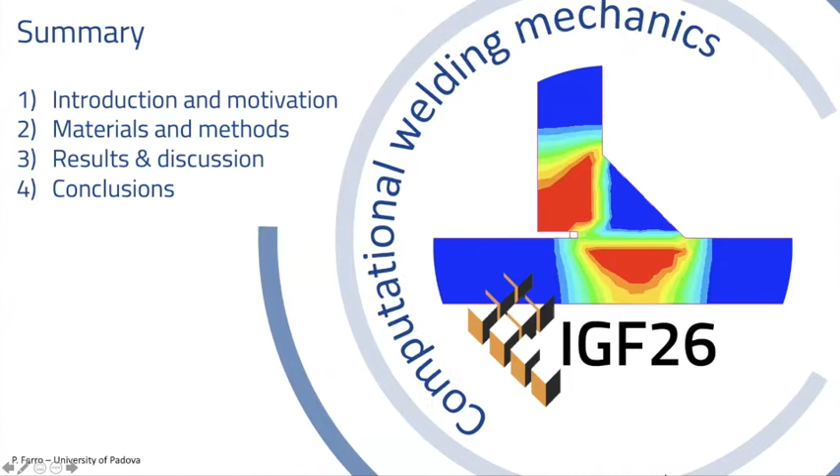This is the summary of the work. Number 1, introduction and motivation. Number 2, materials and methods. Number 3, results and discussion. And finally, as always, the conclusions.

Low-carbon structural steels, such as the S355, are characterized by good weldability and find application in production of steel bridges, structures, ships, and so on. However, it is unfortunate that welding operations induce high residual stresses that reduce the fatigue life of those components in the high cycle regime. Different strategies were developed to face this issue, and when possible, post-welding heat treatment aimed at reducing the residual stress intensity could be a solution.

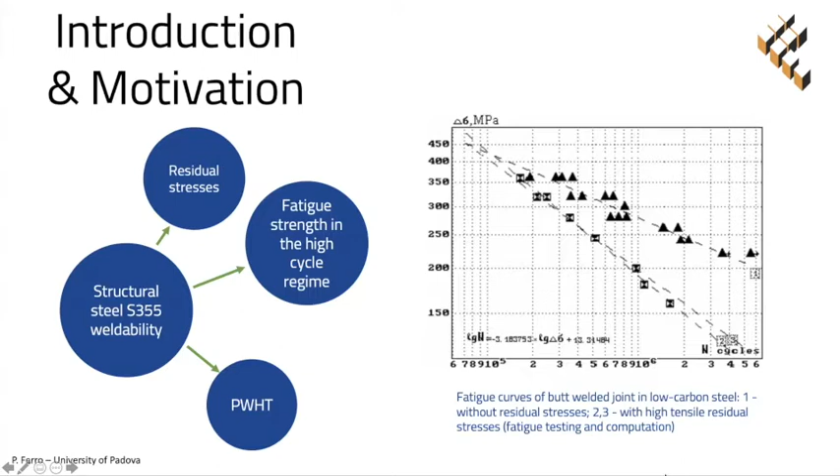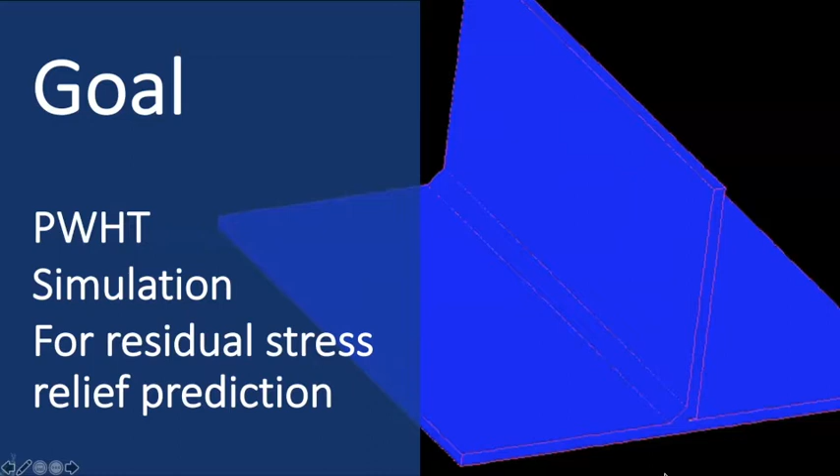In this scenario, prediction using numerical simulation of stress relief and deformation after post-welding heat treatment could be of great interest. But despite the great interest in models related to post-welding heat treatment simulation, in view of the prediction of a fatigue strength improvement coming from stress relief, not sufficient literature was found on this topic, and in particular when the common structural steel S355 is considered. Therefore, this work is aimed at filling this gap.

Square groove T-joints were obtained by arc welding a 5 mm thick web on a 5 mm thick flange made out of S355 steel using a single pass on only one side, as shown in the figure on the left side. Before welding, the flange and the web were tack welded and perfectly positioned perpendicularly to each other using a square. See the figure on the right side.

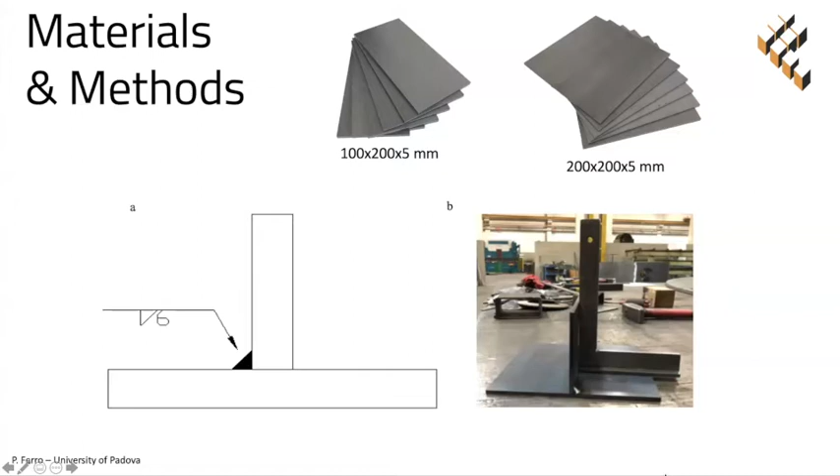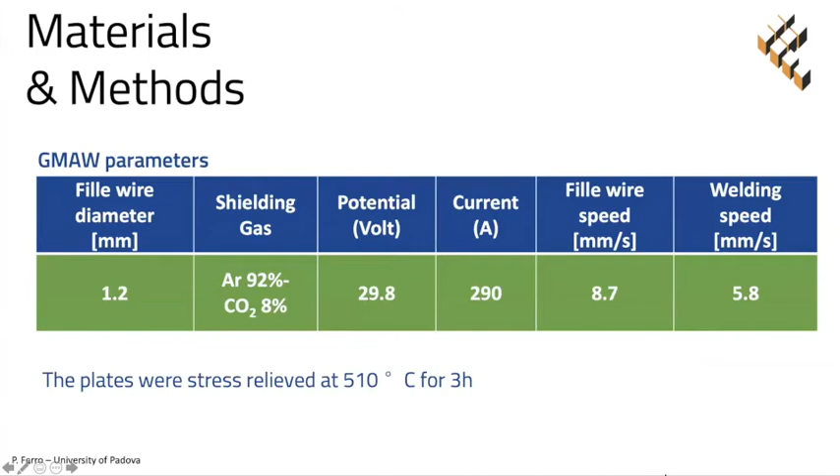More in detail, manual gas metal arc welding was used to produce the samples, and parameters are summarized in this table. After welding, the joints were heat treated at 510 Celsius degrees for 3 hours. The measurement of the joints' distortions before and after the stress relief heat treatment was performed using an absolute arm and a support to keep the sample in position during the measurements. The obtained point cloud was then elaborated via software to obtain the angle between the web and the flange.

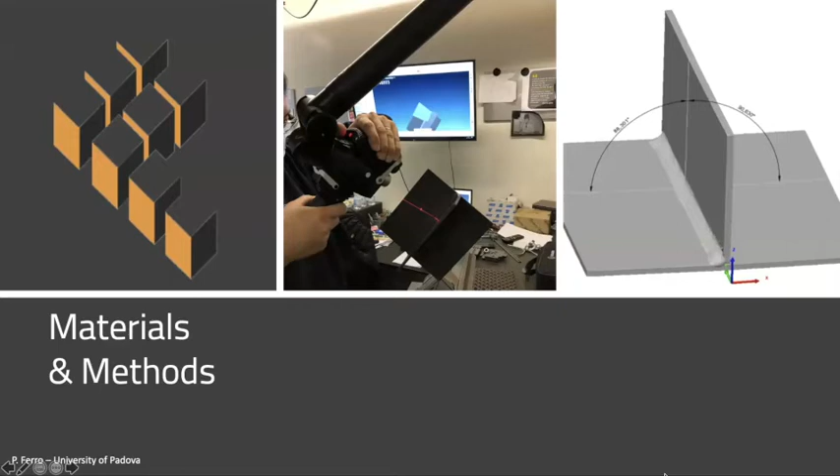The heat source was modeled using a double ellipsoid power density distribution function proposed by Goldak, where its parameters are calibrated by using experiments. Radiative heat loss using the Stefan Boltzmann law and convective heat loss were applied at the boundary of the plates to be joined. In the mechanical computation, the weldment was considered isostatically clamped.

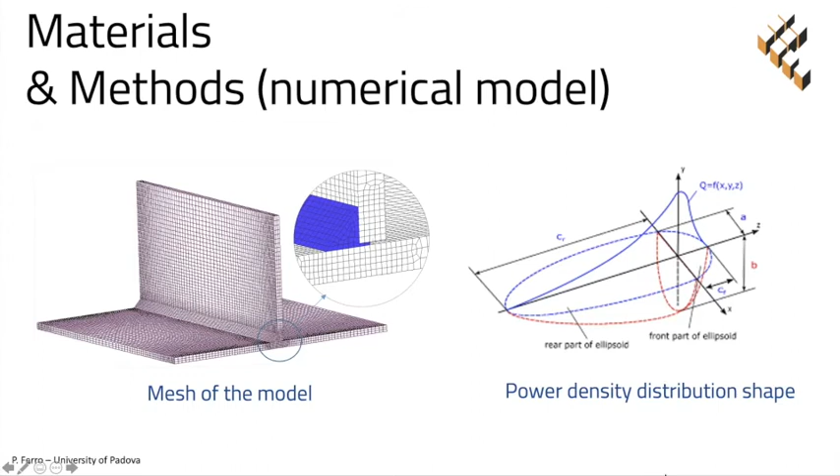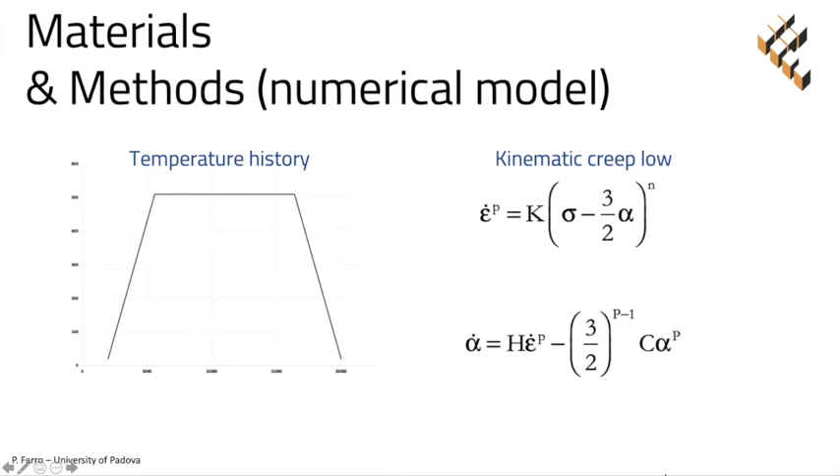After welding simulation, the joint underwent the furnace thermal history used to carry out the experimental stress relief heat treatment, as you can see in the figure on the left. In the mechanical computation, the viscoplastic deformation of the alloy was modeled by using the creep law written on the right side of this slide, where alpha is the kinematic strain hardening variable and H, K, C, P and N are temperature dependent parameters.

The fusion zone microstructure consists of acicular and Widmanstatten ferrite with islands of allotriomorphic ferrite, in agreement with the microstructure observed in low-carbon steel welded joints. The heat-affected zone, on the other hand, was mainly composed of bainite as predicted by the model.

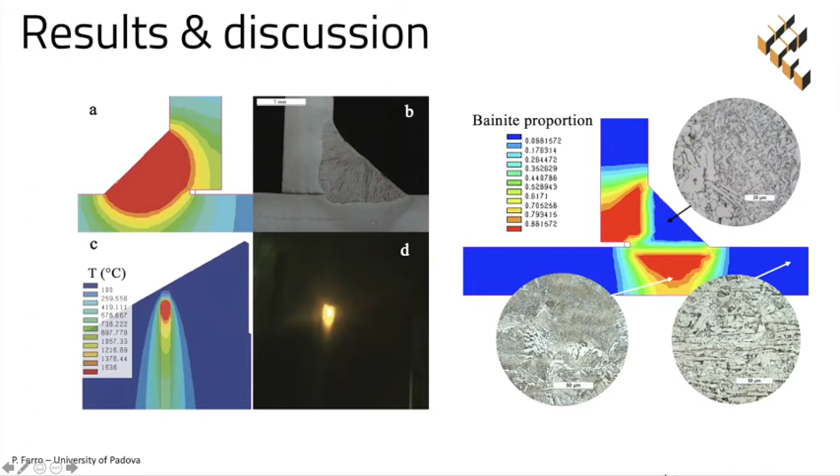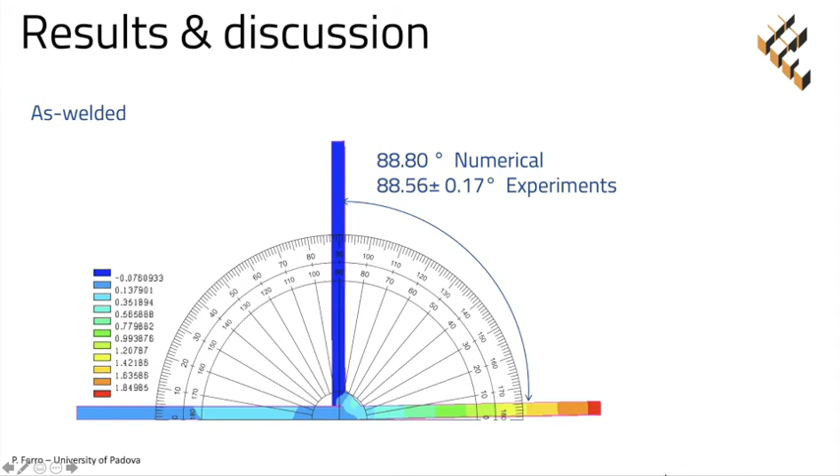After welding, the angle between the flange and the web obtained by the numerical model was 88.8 against an experimental value of 88.56, which is considered a reasonably good result. After stress relief heat treatment, the distortion angle didn't show any variation, and the numerical results confirmed that experimental evidence. However, residual stress reduced significantly as shown in this figure.

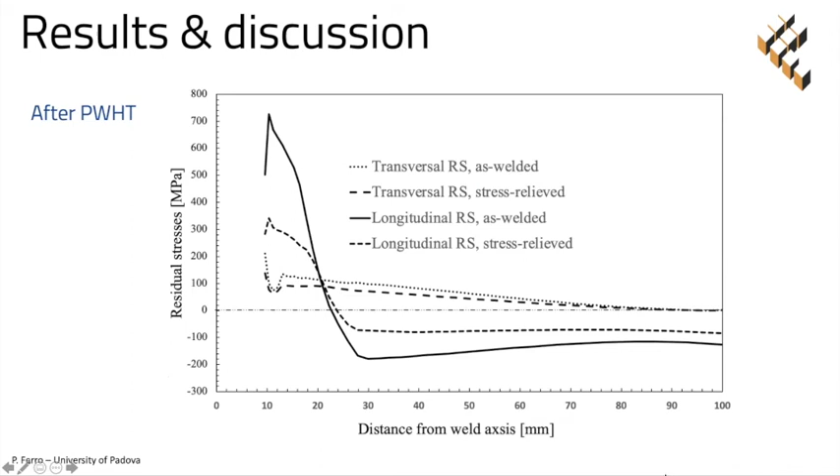So we arrived at the conclusions. Number 1, a setup of a numerical model aimed at predicting the deformation and residual stress before and after post-welding heat treatment of structural steels was successfully carried out. Number 2, the main phenomena involved in the welding process and heat treatment were taken into account with particular attention to solid-state phase transformation effects.

Number 3, a creep kinematic law was implemented and applied to predict the mechanical effects of the stress relief heat treatment. Number 4, results showed a good agreement between the numerical and experimental results in terms of both microstructure and welding-induced distortions. Finally, number 5, further investigations are in progress to validate also the residual stress relief prediction.